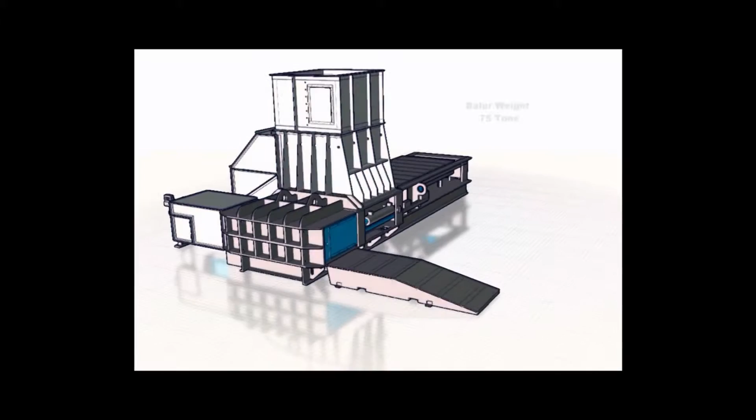Olympic Wire and Equipment presents the IPS 2-ram baler with the patented pre-compression lid. This baler is constructed quite differently than all other standard 2-ram balers. It weighs in at 75 tons in comparison to a standard 2-ram baler that weighs in at 51 tons.

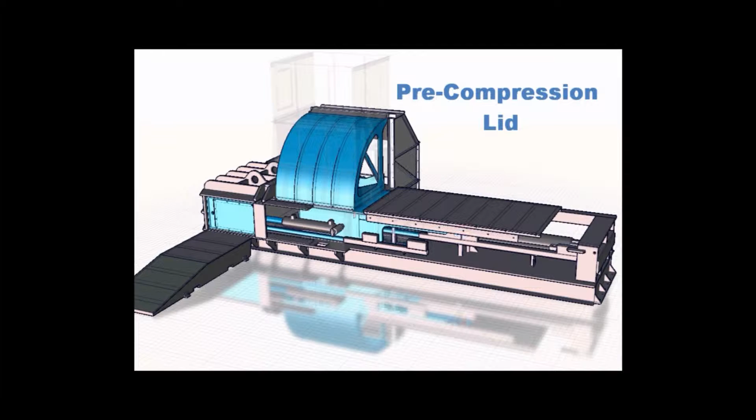This baler also is constructed with this pre-compression lid option, which allows you to bale without shearing or cutting of the material. The lid compresses the material down below the shear bar at a 2-to-1 ratio. So for every stroke, you achieve more volume per stroke.

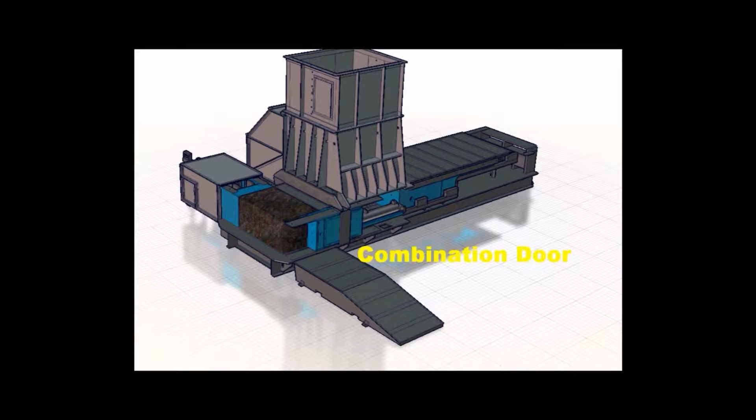This allows you to bale products such as PET within 5 strokes versus your 15 strokes on a standard 2-ram baler. It also comes with a combination door. It is a bale release and a bale separation, so you do not get contamination between materials.

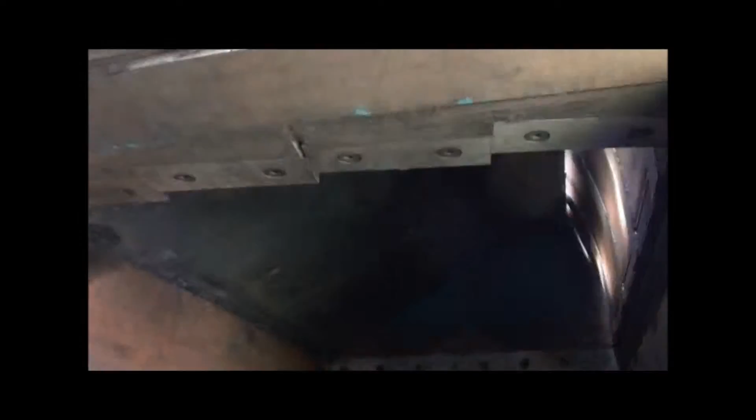The material is loaded on top of the pre-compression lid. The ram comes forward, compresses into the bale chamber, retracts. Then the pre-compression lid opens up, material falls down inside, pre-compression lid compresses the material in the bale chamber again, ram comes forward.

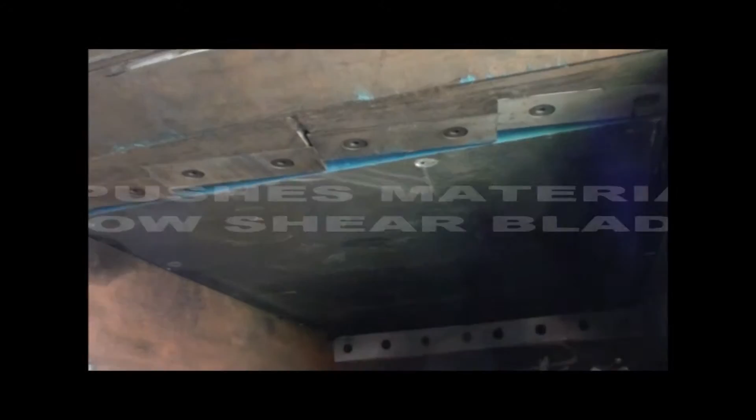Note how the ram rides on the floor, which is tongue and groove. This allows the ram not to shift from side to side. This pre-compression lid pushes all the material below the shear blade.

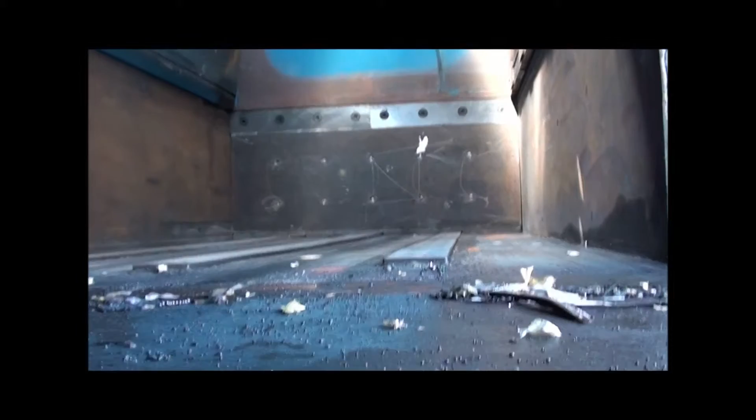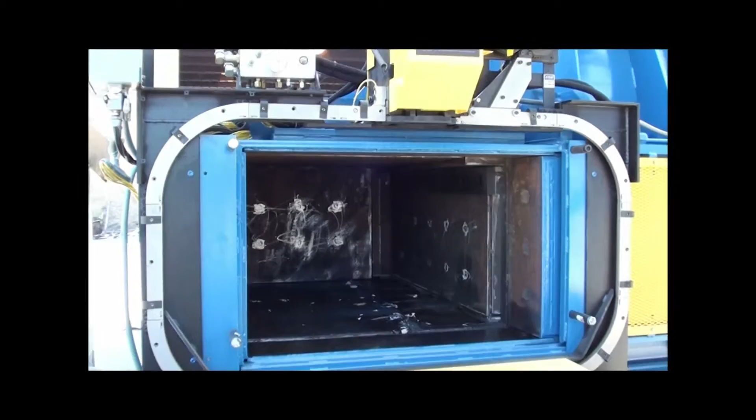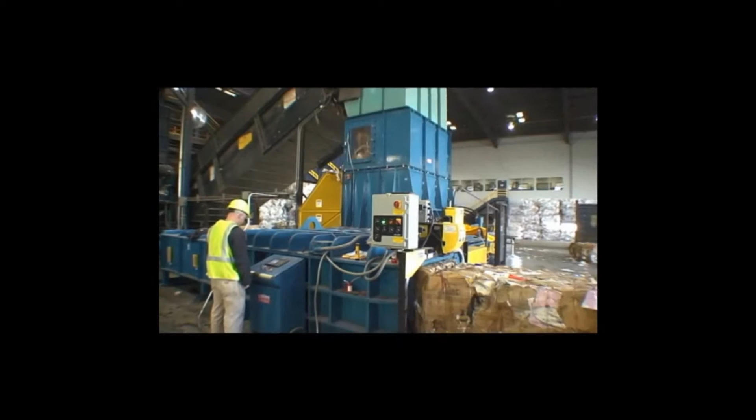The ram now is moving forward and compressing against this wall. It is tying off and baling at the same time. Look again. Eject ram that is moving the bales forward. It's tying off. The pre-compression lid comes back, material drops in the hopper, compresses the material below the shear blade, and the ram moves forward and compresses the material.

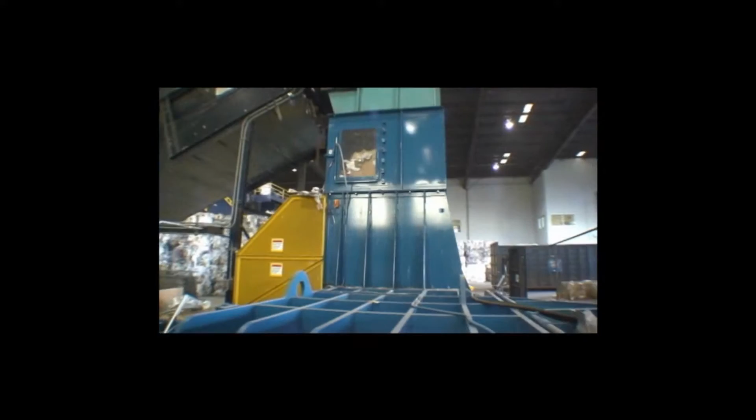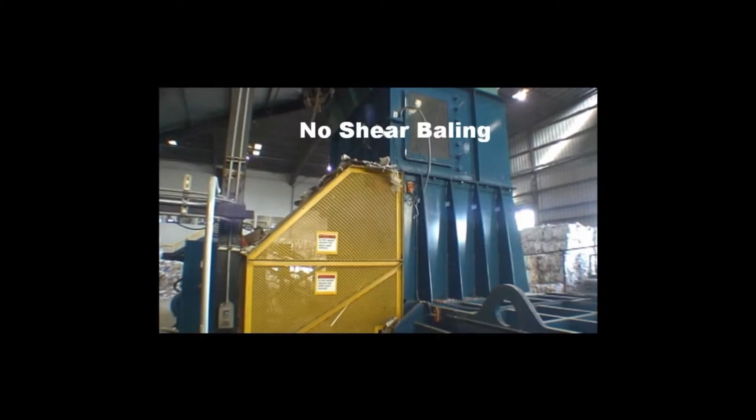The ram is in the back position right now. The pre-compression lid comes back, material drops at a designated amount of material. No shearing is taking place.

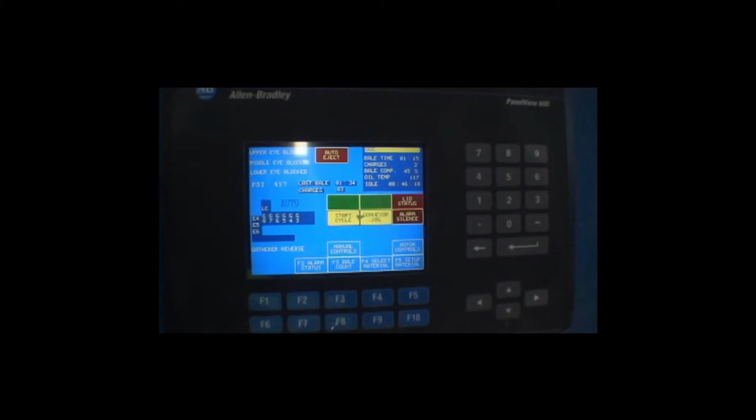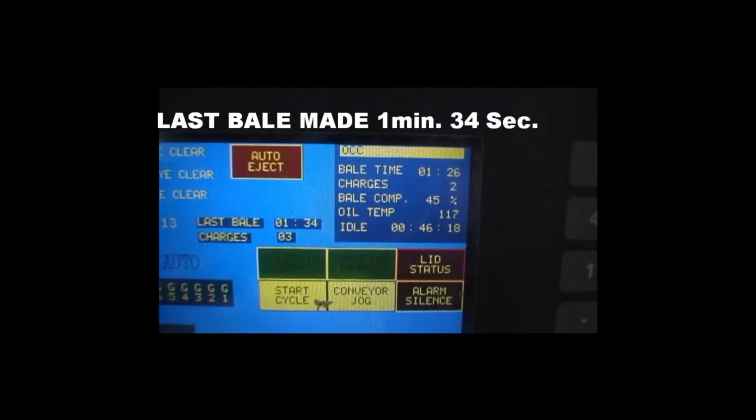The touchscreen that comes with the baler, this is the standard compression. As you can see on the top of the screen, we are baling OCC. Last bale made, as you can see in the middle, is 1 minute 34 seconds with 3 charges. It's only 3 strokes to make a complete bale.

OCC baling production, average bale weight is 1,600 pounds. Average OCC bale made is 1 minute and 30 seconds. Average tons per hour is 31 tons. And we're doing this in 2 to 3 strokes to make a bale.

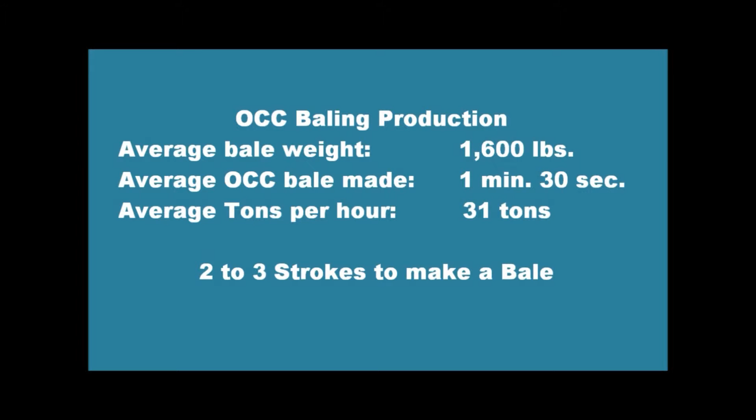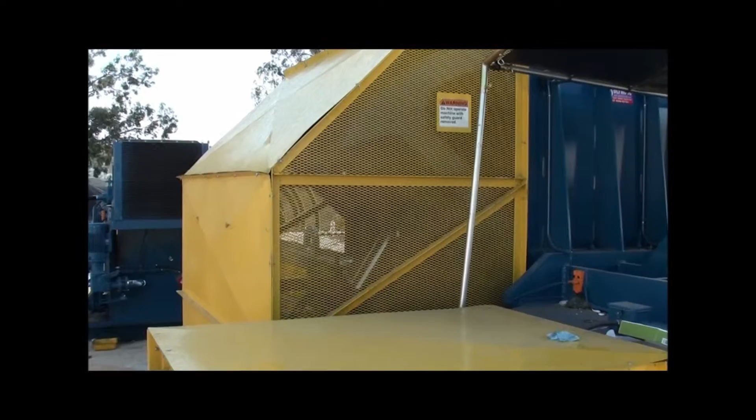This is a standard 2-ram baler without a lid. Note as the ram retracts. As the ram moves forward, watch all the bottles move up the hopper at about 4 feet. So you're losing a lot of volume on every stroke. On the IPS, the pre-compression lid comes back, compresses the material down into the bale chamber, and then the ram comes forward.

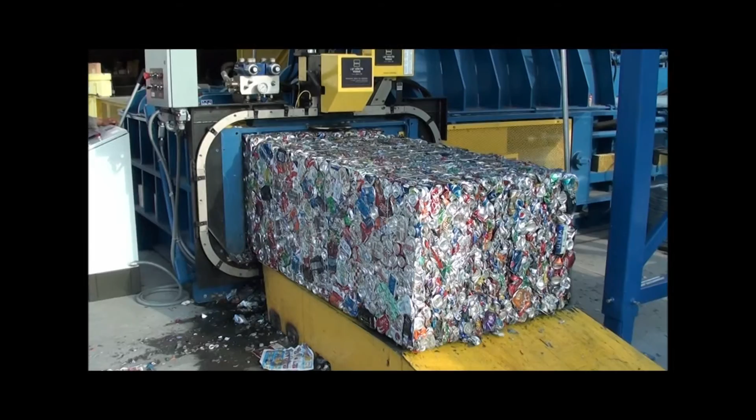This allows you to make a bale in far less strokes, which reduces wear and tear, a lot of maintenance, reduces electricity, as well as time to make a bale. Pre-compression lid will save you big dollars over a standard 2-ram baler.